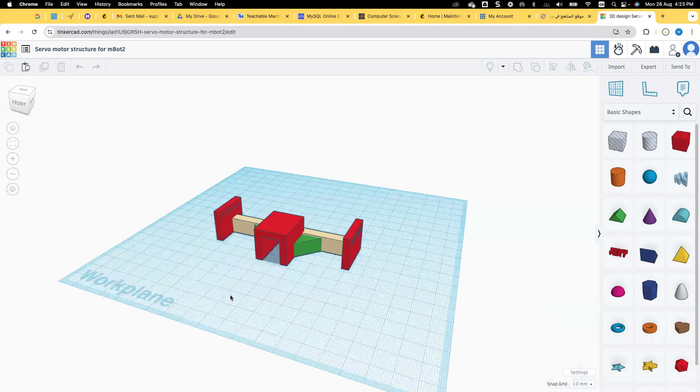So basically, what you can see on this workplane is a design for a bridge made in order to be added to the robot MBOT2. This robot could perform extra tasks once we add this bridge on it, because here in this area I'll be putting a servo motor, and the bridge will be fixed from both sides to the MBOT2 robot, in order to plug it and fix this servo motor.

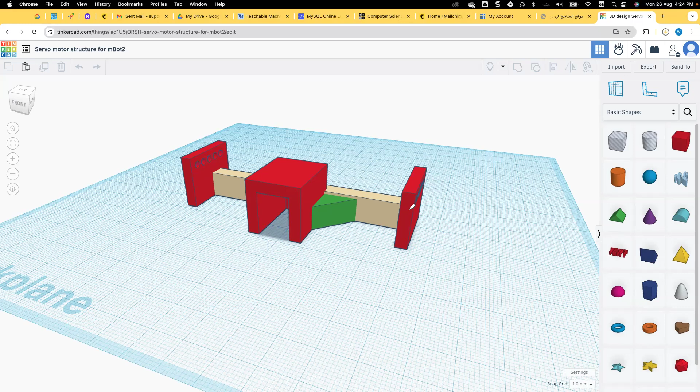So the robot will have additional functionalities. It's really important to show students that what they are doing in 2D or cartoon drawing will lead to this. As teacher, you are asked to have this conviction, and you have to be aware why we are giving those topics, because you cannot imagine how students will interact with them.

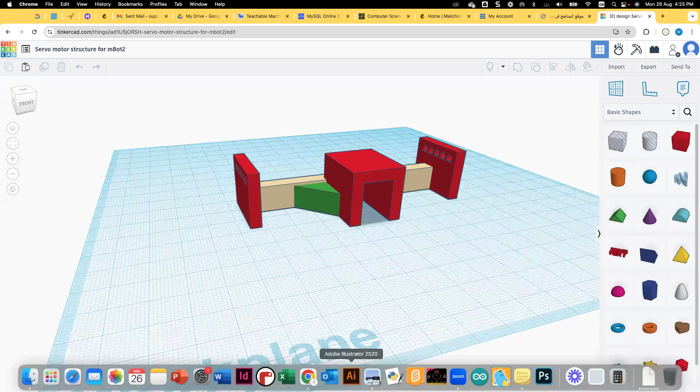So back to my topic, my scope and sequence program. I can say that topic number 4, which is the biggest in our curriculum, is where students will be introduced to algorithm and coding by developing skills in algorithm, Scratch Junior, Scratch, Small Basic, and Python. It's clear how the program is designed.

Then we will go to the MBOT2 robot, which you will be having this year from grade 2 till grade 9, then the microbit as a microcontroller for lower grades, from grade 3 up till grade 6, and the Kitronik kit, related to the microbit, and the Arduino, the microcontroller designed for higher grades starting from grade 7, and for higher grades, Access, HTML, CSS, PHP, and MySQL. The new updates we've added to our platform are artificial intelligence and machine learning.